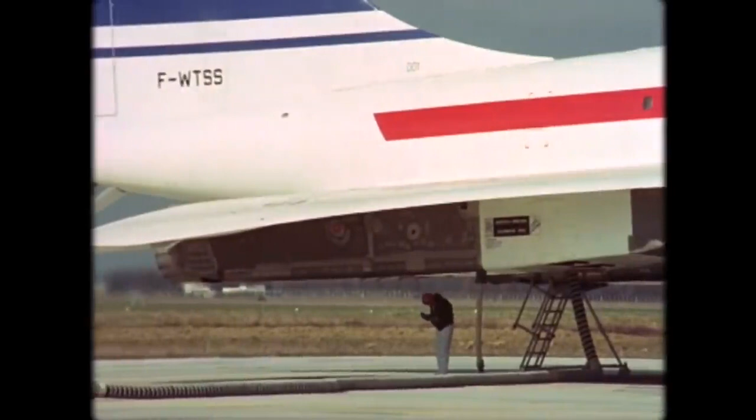The Concorde's legacy is marred by its commercial failure, but this engineering marvel was a triumph of ingenuity. Nothing remotely close to it had flown before, and nothing like it has flown since, turning what had been a military-only technology into a luxury flying experience required innovative thinking. This is the insane engineering of the Concorde.

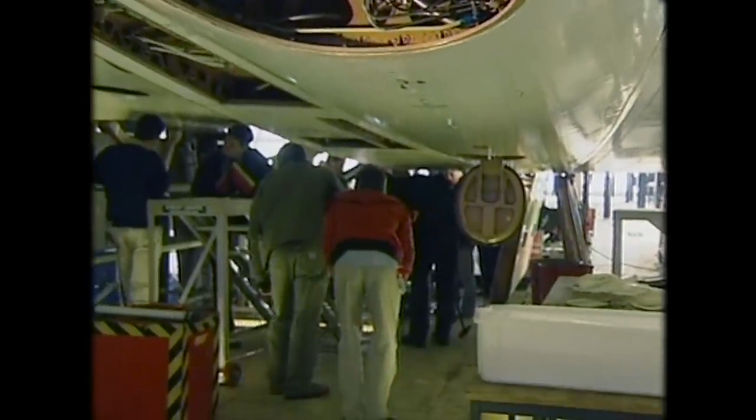The engineers of the Concorde had several unique challenges. Developing a supersonic plane is difficult enough with military design requirements, but developing a supersonic plane that would satisfy the wealthy customers it intended to serve is an entirely different ballgame.

Aerial refueling makes fuel efficiency a secondary concern for the military. The comfort of the plane's passengers is an afterthought at best, and the price tag attached to these often limited-run specialty planes is beyond the budget of a commercial airline.

Those needs are reflected in the Concorde's unique design: a sleek exterior hiding powerful engines, engines developed from the iconic British warplane, the Avro Vulcan.

Fuel efficiency and supersonic flight are two opposing ideas, but these engines, the Rolls-Royce Olympus 593, when flying at Mach 2, were the most efficient engines ever created.

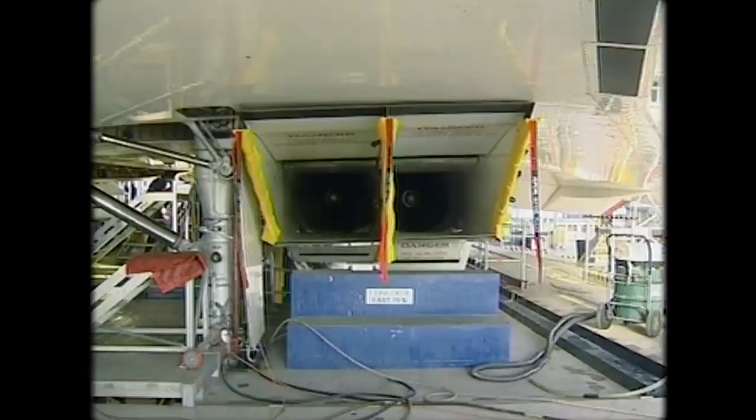These engines, when introduced for the Avro Vulcan, were capable of generating just 49 kilonewtons of thrust, but over the course of their adaptation for use in the Concorde, increased in thrust by over triple to a whopping 169 kilonewtons.

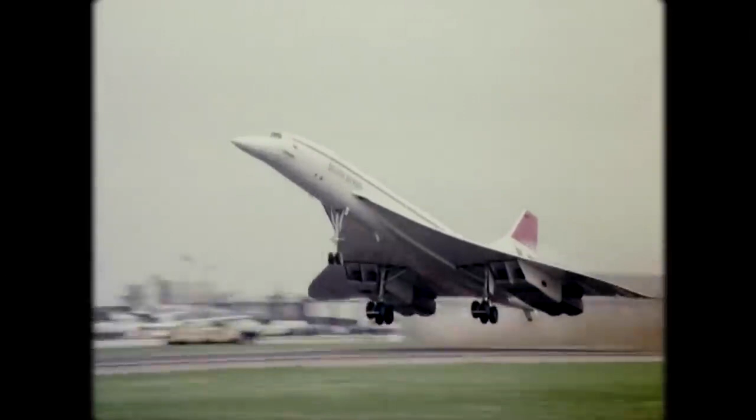20% of this thrust increase was provided by newly fitted afterburners, a technology typically reserved for military planes. Afterburners work by injecting fuel directly into the superheated and high-pressure exhaust of the turbine section.

Despite this air's journey taking it through the combustion chamber, only half of the oxygen in the air is consumed, leaving untapped energy in the exhaust of these engines. To capture this energy, fuel can be injected directly into the exhaust of the turbines and ignited, basically acting like a rocket stage of the engine, causing further expansion and acceleration of the exhaust through the exhaust nozzle.

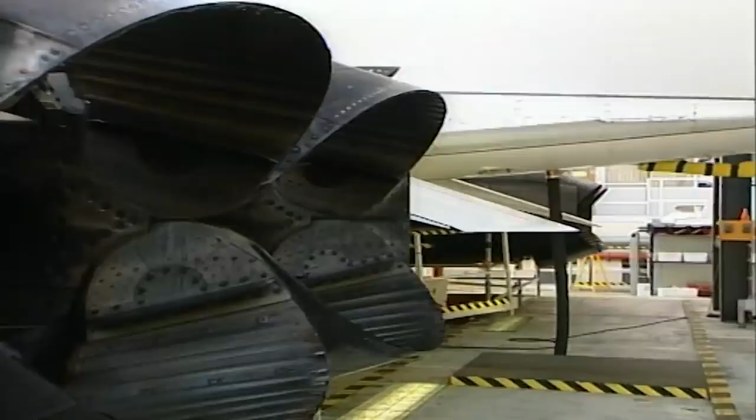However, this system is useless without a controllable nozzle. Typical airliner engines have a fixed nozzle, because these aircraft are expected to be efficient at a relatively low range of subsonic speeds. But the Concorde, with its massive range of speeds, needs not one, but two controllable nozzles to adequately control the engine's power.

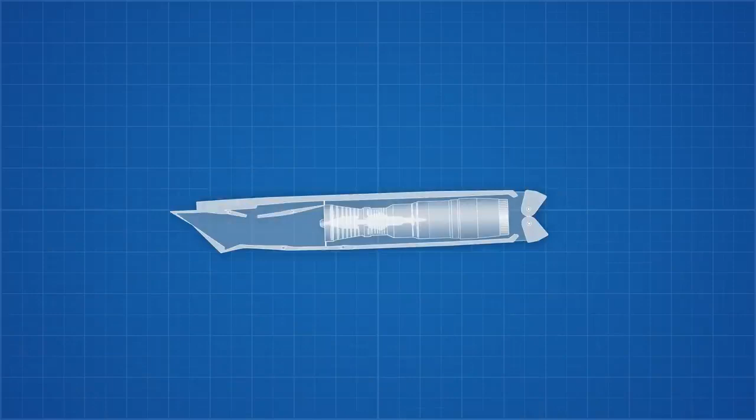The primary nozzle connects directly to the jet pipe's exit and consists of petal-like structures that can close or open to vary the diameter and therefore the area of the jet's exit.

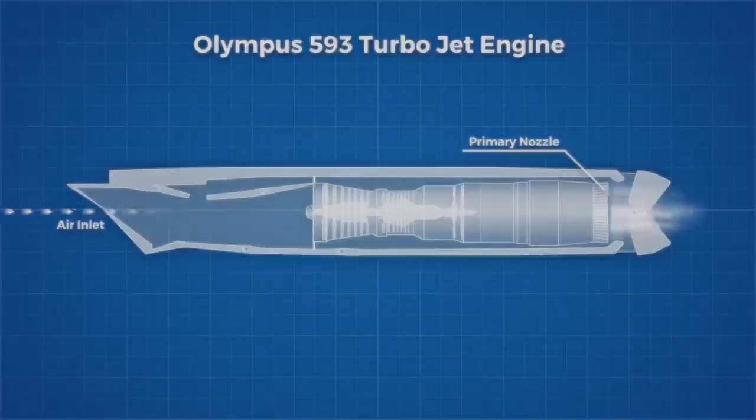When the afterburner, or reheat as the British engineers called it, was ignited, it caused a massive increase in pressure at the engine's exhaust. This increase in pressure could cause choked flow in the engine, where high pressure zones behind lower pressure zones will prevent air from flowing through the engine correctly.

To prevent that, the primary nozzle opens wider when the afterburner is active to decrease pressure and ensure the mass flow rate through the engine is unchanged.

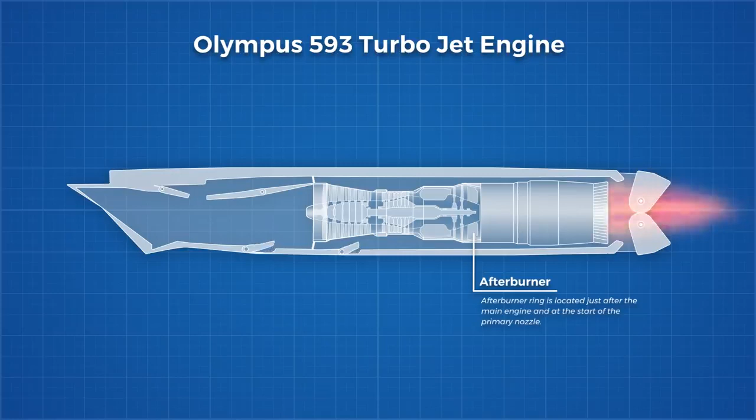However, at times, we do want to affect the flow upstream of the nozzle. The Olympus 593 was one of the world's first two-spool engines, predated only by the Pratt & Whitney J57 engine by just a couple of months. Two-spool means the engine contained two compressor sections driven by two turbine sections, each acting on their own concentric drive shafts, allowing the two sections to operate at different rotational speeds.

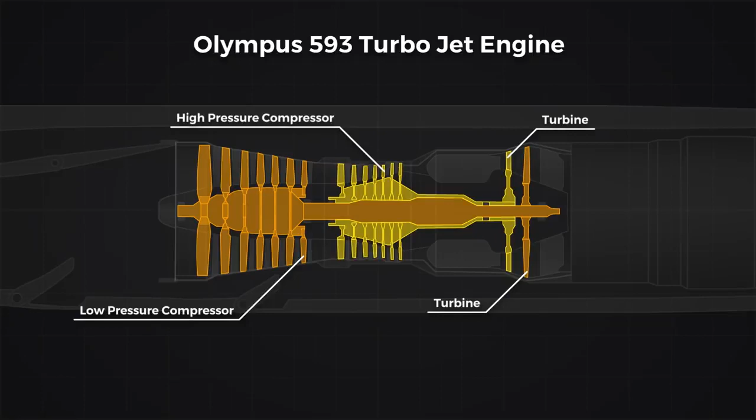When the primary nozzle was actuated, the varying nozzle pressure caused the low-pressure spool to either spin faster or slower, thus providing control of the engine to ensure it can perform at its optimum speed across its wide speed range.

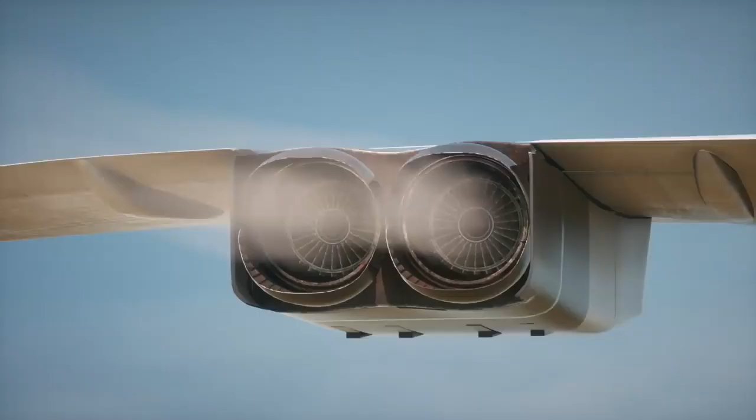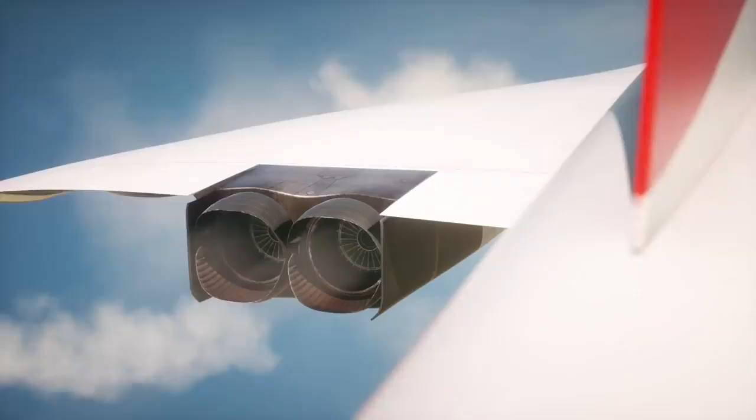The secondary nozzle function is just as complex. The eyelid doors look like some kind of steampunk blast shield, and for good reason. The force these secondary nozzles had to endure influenced their appearance, withstanding huge forces at both supersonic and subsonic speeds, and they could even close completely on landing to function as reverse thrusters.

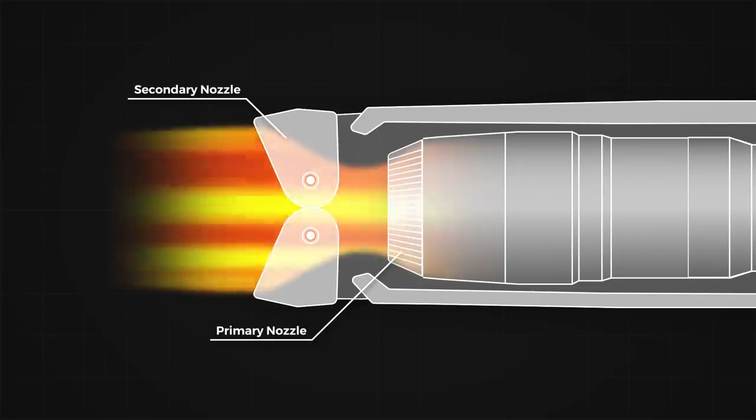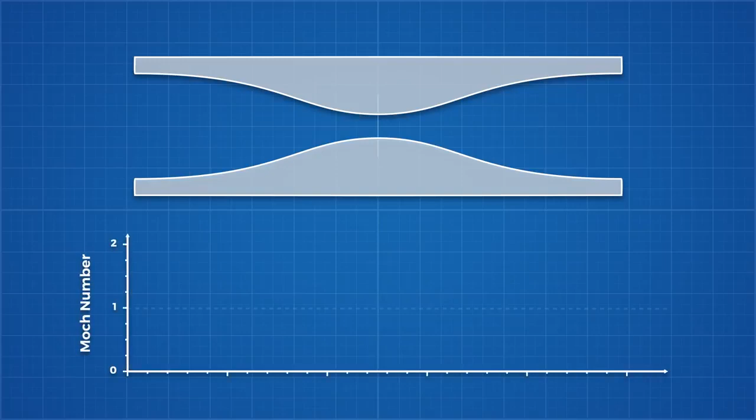By actuating these nozzles, the plane could carefully manipulate the exhaust velocity and thus maximize thrust, because together the pair acted as a controllable converging-diverging nozzle. Converging-diverging nozzles are typically used in rockets to accelerate the combustion products to their optimum speed and pressure. The opposite shapes are needed because air acts completely differently at subsonic and supersonic speeds.

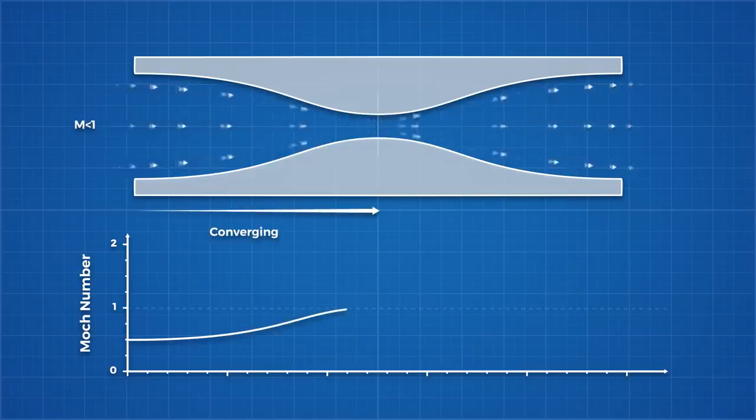For example, when subsonic air travels through a converging duct, it speeds up as the cross-sectional area decreases until some critical area, which is referred to as the throat. This is where Mach 1 would be reached. At this point, no further acceleration of air can occur as the flow is choked.

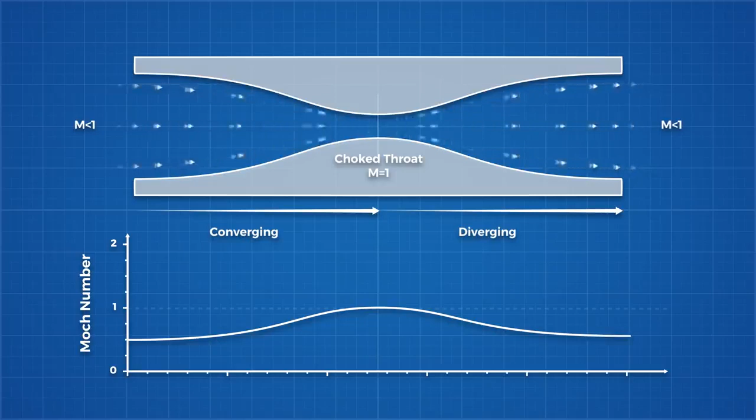Now, as you would expect, if that same subsonic airflow went through a diverging duct, the air slows down as the duct area increases. This is Bernoulli's principle at play. The bizarre thing is, the exact opposite occurs when air travels at supersonic speeds. A converging duct will result in a decrease in velocity, and a diverging duct will result in an acceleration.

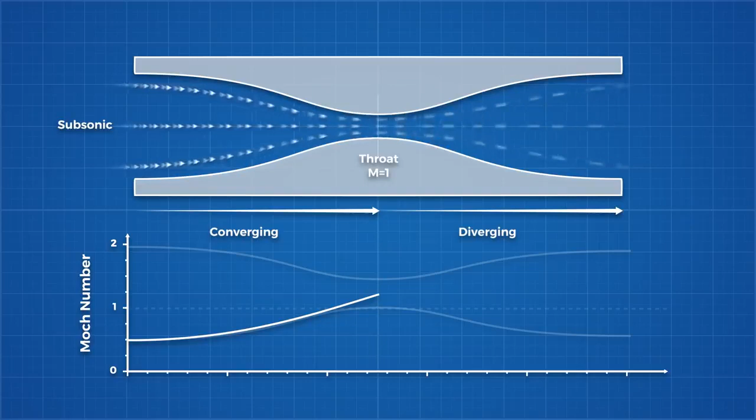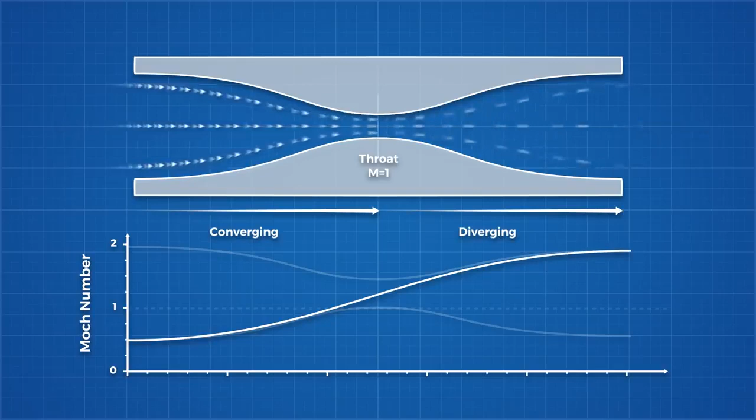So, in order to maximize the acceleration of our exhaust gases, we want to pass our subsonic air from the engine first through a converging nozzle, the primary nozzle, until it reaches Mach 1 at the throat. Then we want it to pass through a diverging duct, the secondary nozzle, at supersonic speeds so it can continue to accelerate. These paired nozzles allowed the Concorde to carefully optimize the nozzle profile for different flight conditions, a marvelous piece of engineering. The same principles were used for the inlet.

No engine can operate with supersonic flow. The shockwaves that would form inside the engine would cause all kinds of chaos. So, the Olympus 593 needed some way to decelerate the supersonic air entering its unique square inlets. These squared inlets were designed to simplify the complicated task of creating nice laminar subsonic flow for the engine's compressors.

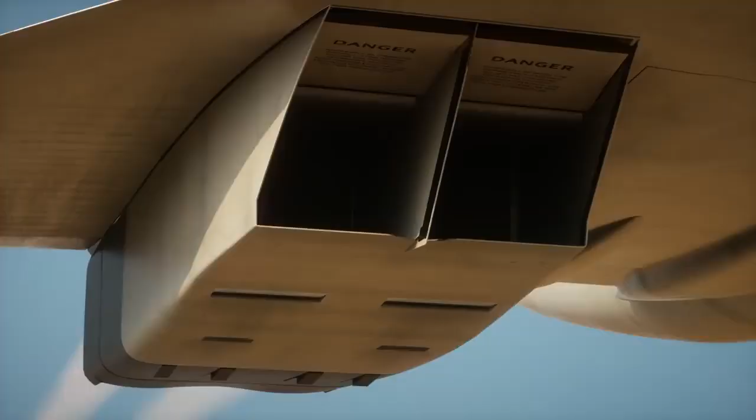Inside were a series of ramps and doors that could open and close depending on the flight regime the intake was encountering. At takeoff, the engines required all the air they could get to accelerate the plane enough to get those cumbersome delta wings to generate enough lift to take off.

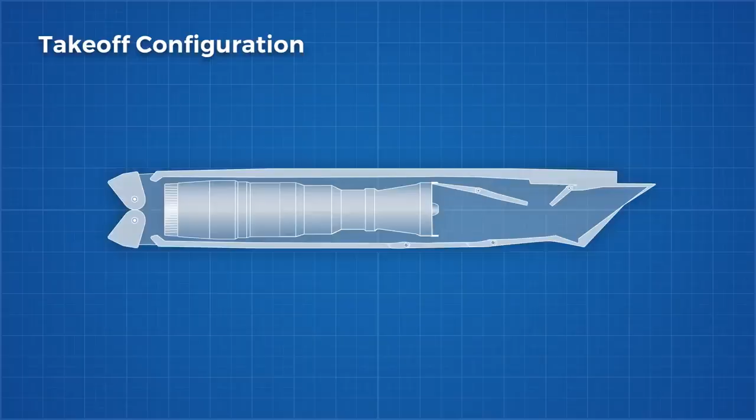To funnel as much air as possible into the engine, the two variable ramps were retracted into their closed position. A spill door in front of the engine intake was held open to allow additional airflow into the engine, while two bypass doors which controlled the air around the cooling passage around the engine were also closed.

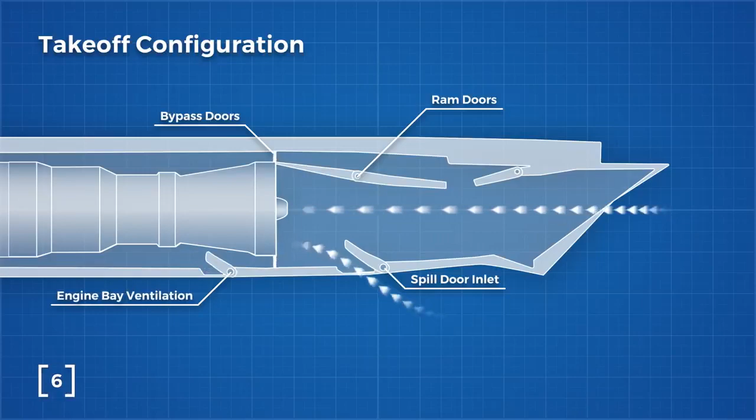The afterburners were also active during takeoff, but soon after, the Concorde was required to enter a noise abatement stage of flight, where the afterburners were turned off and power was reduced as the plane climbed. At this point, the bypass doors open to allow for cooling air to travel along the outside of the engine.

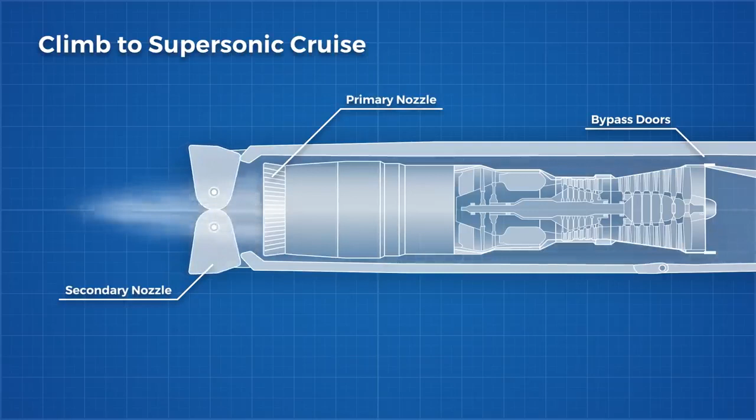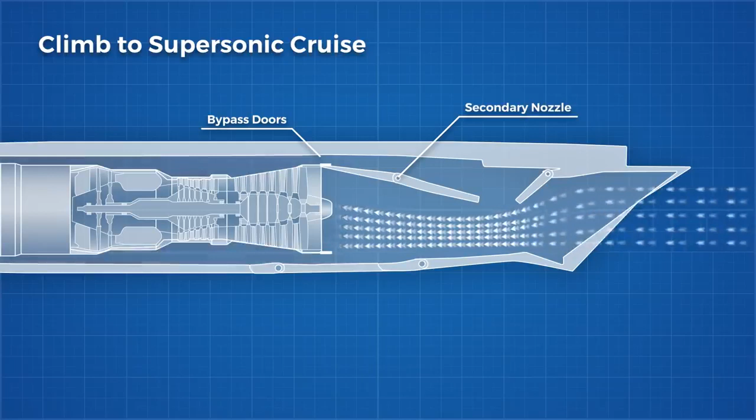As speed increases, the primary and secondary nozzles adapt, gradually beginning to form the ideal converging-diverging nozzle for supersonic cruise. Parallel to these changes in the nozzles, the inlet ramps actuate to create a converging inlet that slows down and compresses the supersonic air entering the engine.

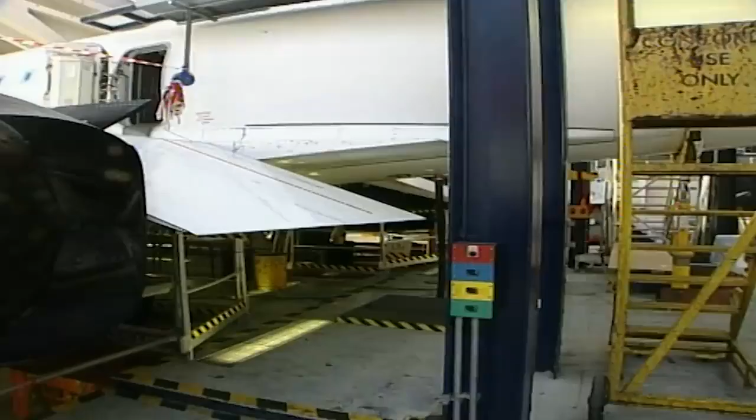The fuel consumption of supersonic flight is massive, but that is primarily driven by aerodynamic drag, not thermal efficiency. This supersonic air being rammed and compressed into the engines helps the engine immensely in achieving its high thermal efficiency.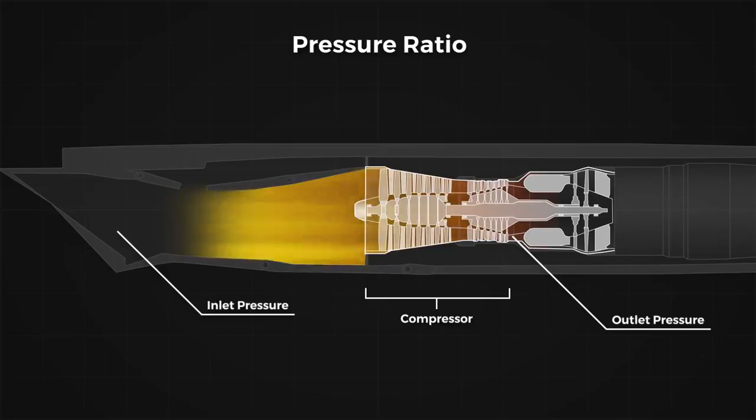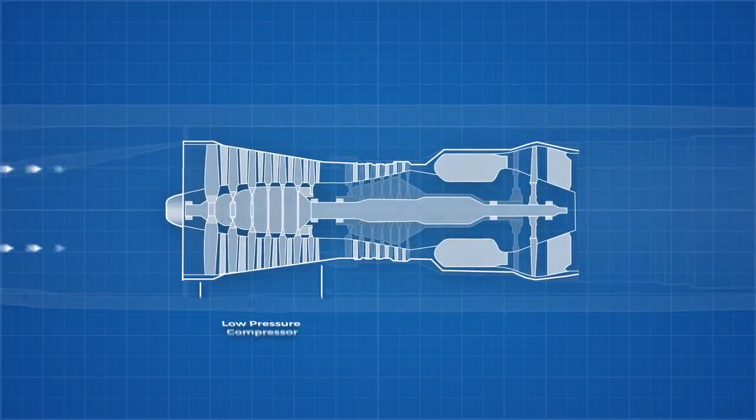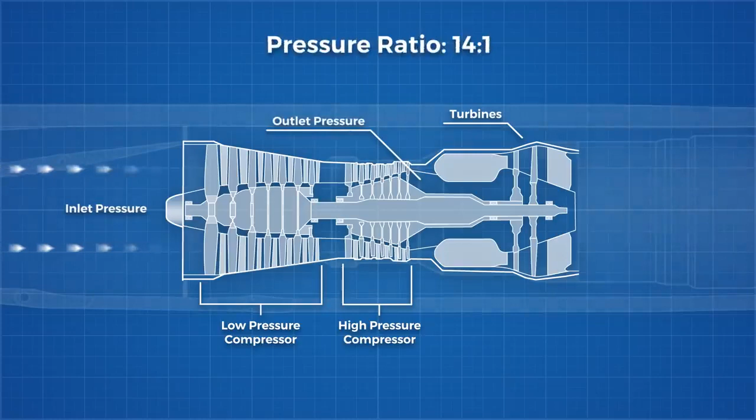The low pressure and high pressure compressors together provided a pressure ratio of 14:1, a moderately high pressure ratio that would provide moderate efficiency at subsonic speeds.

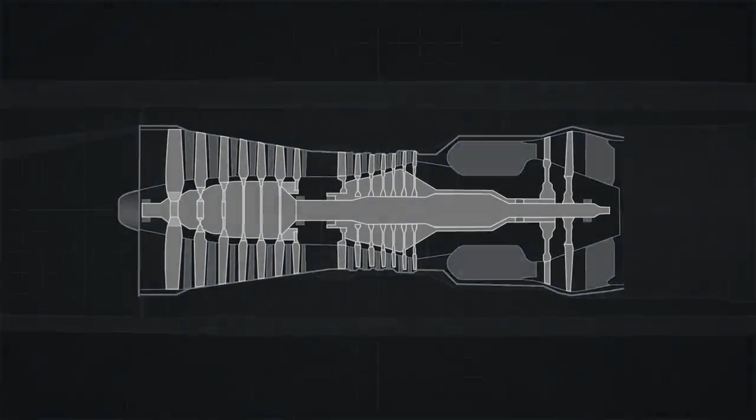However, the pressure ratio multiplied to 80:1 at cruise as the supersonic air rammed into the unique square inlet engines. This elevated pressure ratio resulted in extreme temperatures inside the engine that necessitated the use of high-temperature alloys typically reserved for the turbine blades.

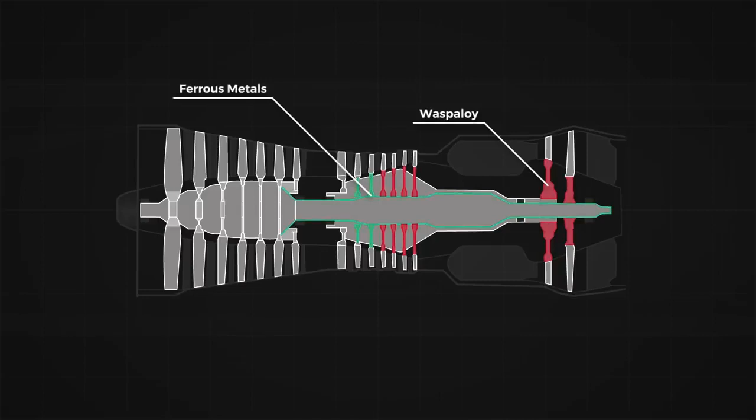Titanium blades were used for the early compressor stages, and high-temperature nickel alloys were used in the even hotter later stages. Cooling the driveshaft bearings became another engineering challenge. Increasing the mass flow rate of cooling oil was not enough to keep the bearings within a safe operating temperature.

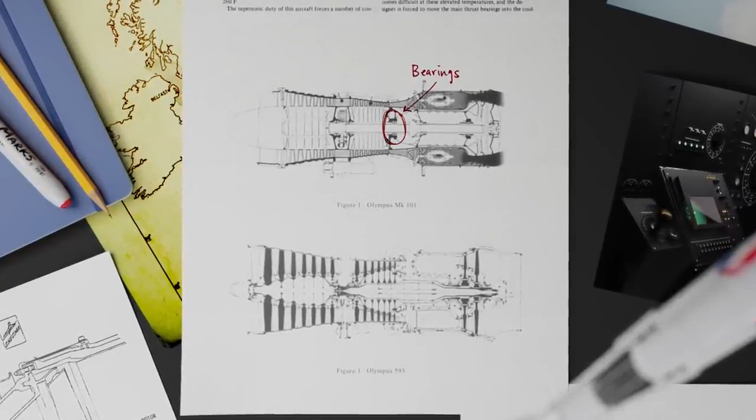Looking at the differences between the original Olympus engines used in the Avro Vulcan and the Concorde hints towards some changes the engineers were forced to make. A center bearing located immediately after the high-pressure compressor here no longer exists in the Olympus 593, and the driveshaft preceding it takes a bottle-like shape, increasing in diameter in the new gap between bearings.

This center bearing had to be removed because the temperatures were too high in this location directly after the high-pressure compressor. But without the support of the bearing, the driveshaft became too flexible. To accommodate this change, the driveshaft needed to increase in diameter to increase stiffness.

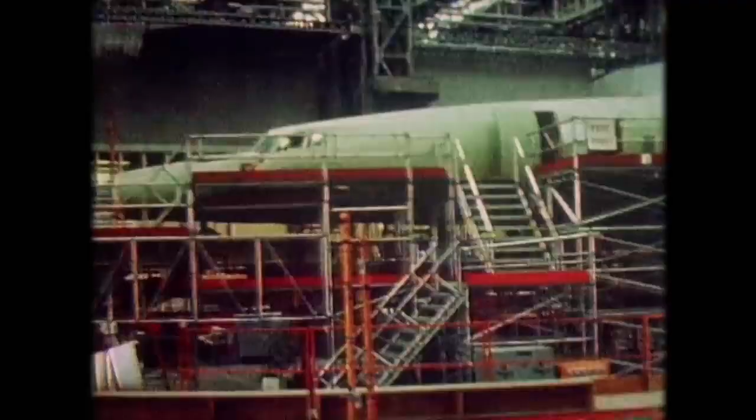The Concorde is full of strange little design details like this, solutions to unique engineering problems caused by the immense cruising speed. In order to decrease fuel consumption as much as possible, the front area of the plane needed to be minimized. Delta wings allow wing spans to be decreased dramatically and reduce the drag created in supersonic flight. However, it creates some issues for low-speed flight, where they struggle to generate enough lift, making takeoffs and landings difficult.

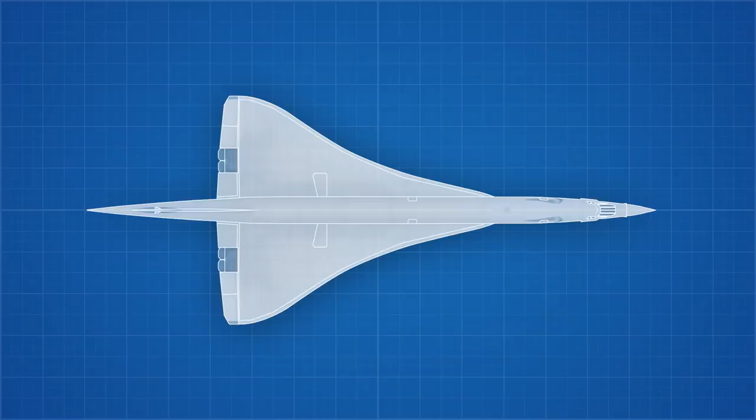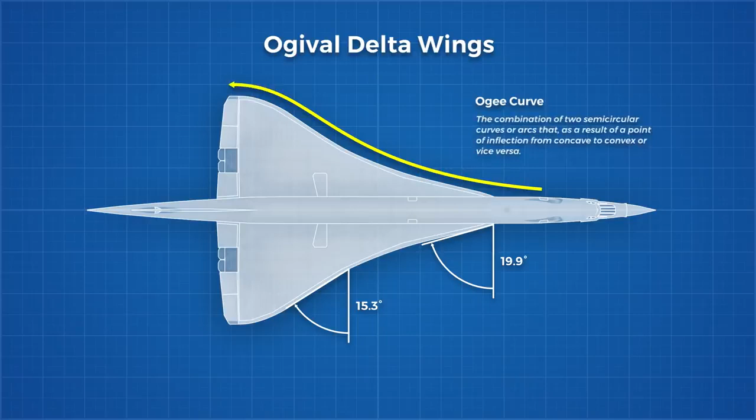This is where the ogival delta wings of the Concorde come into play. This is a form of compound delta wing where there are 2 sections to the wing, with the forward section having a higher sweep angle than the rear section, connected with an ogee curve, going from concave to convex curves smoothly. This shape allowed the Concorde to generate additional lift at low speeds through the use of vortex lift.

When flying at high angles of attack, separated airflow would roll over the wings to form 2 stable cone-shaped vortices, where airspeeds were high and air pressure was low, effectively creating lift.

However, those high angles of attack needed for low speeds created some serious visibility problems for the pilots, whose cockpit would have had a lovely view of the sky if not for the iconic droop snoot.

The droop snoot is a one-of-a-kind solution, a mechanized nose that could drop by 12.5 degrees to provide the pilots a clear view of the runway during these high angle of attack maneuvers.

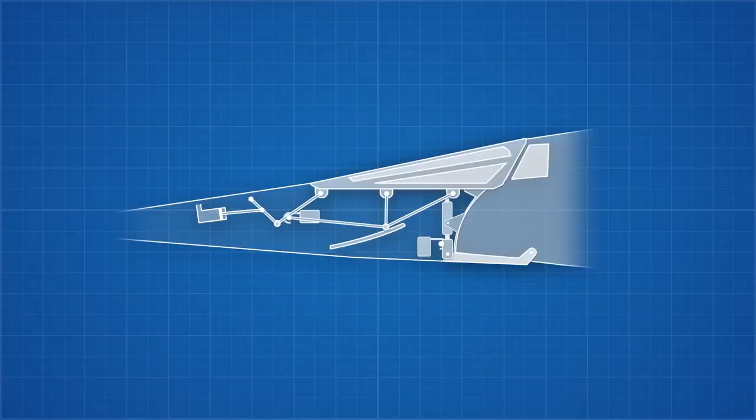The mechanism had 4 positions, controlled by the pilot with this lever. The top position was the fully retracted position used in supersonic flight.

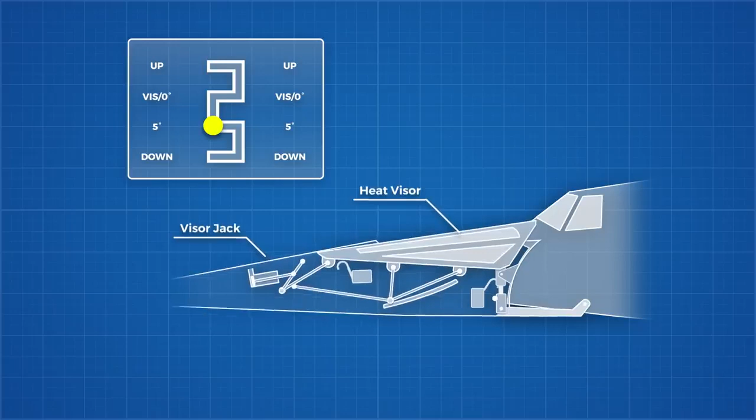The second position lowered a specialized heat shield visor used to protect the cabin windows from the heat of supersonic flight. When placed in this position, the visor hydraulic actuator would retract, causing the visor to retract into the nose fairing. The next position was the 5-degree down position used for takeoffs and taxis, extending this hydraulic actuator.

The final setting pushes the nose down further into the 12.5-degree setting needed for landings.

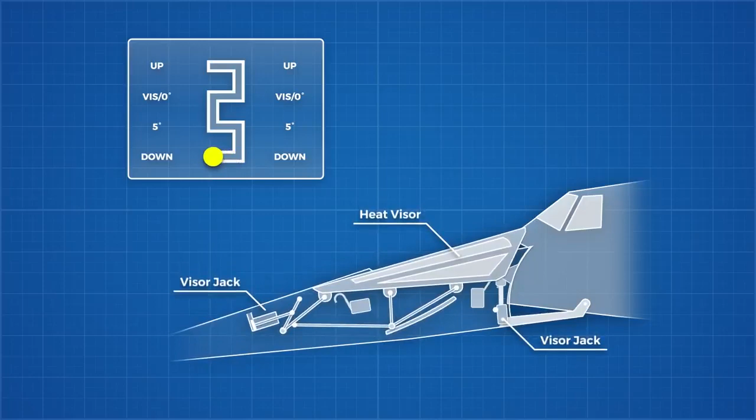The plane also had an extendable tail landing gear, which on most takeoffs and landings was not needed, but was present to protect the plane's engines, which would be the first point of contact for what would normally be a tail strike for other airliners.

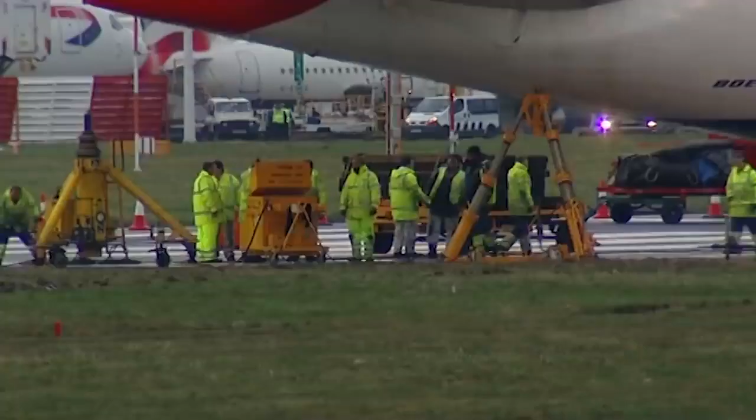Tail strikes aren't all that uncommon, usually happening on landings in difficult conditions. Some planes, like the 777, also have extendable protection measures in the form of tail skids, as a strike can, at best, force a plane into maintenance, costing the airline company money, or, at worst, cause serious damage to the pressure bulkhead and put the lives of the passengers aboard at risk.

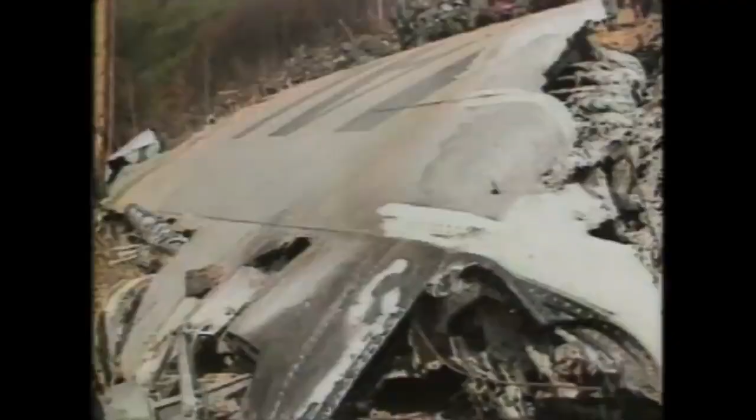In fact, a tail strike is responsible for the crash that claimed the most lives out of any single aviation crash in history. In 1985, a Japan Airlines 747 flight crashed in the mountains of Japan, 7 years after a tail strike had occurred, which had not been correctly repaired.

With the high angles of attack demanded by the Concorde for landings, this protection was vital to keep the plane safe.

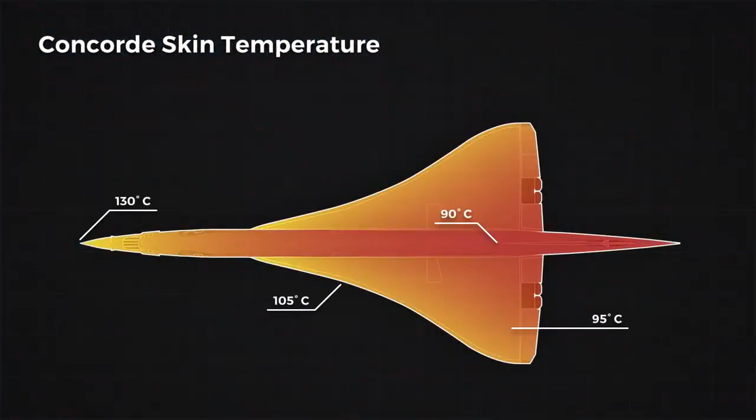The visor was needed during supersonic flight because the nose of the plane experienced temperatures of around 130 degrees Celsius, while cruising at an altitude of 60,000 feet, where ambient temperatures are usually around minus 56 degrees Celsius.

The Concorde went through several design iterations with this forward-facing protection. The earliest prototypes simply removed the lower forward-facing windows completely. But it turned out that pilots like having a view of where they are going, so this wasn't an option for the full production model.

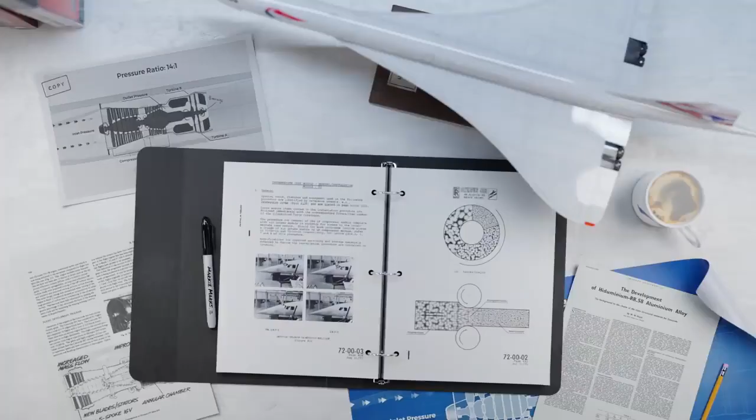However, a version of the droop snoot with a fully metal heat shield was originally considered for the Concorde, which would have eliminated forward visibility during cruise, which was considered non-essential. But thankfully, these heat-resistant glass visors were used in the final version.

Working with such high temperature variations between takeoff and landing causes some serious structural issues, especially with the frequency of flights needed to make a commercial plane financially viable. The thermal expansion caused by these temperatures made the plane grow by 20 centimeters on each and every flight. The fatigue this thermal stress could cause would eventually result in catastrophic failure if not properly accounted for.

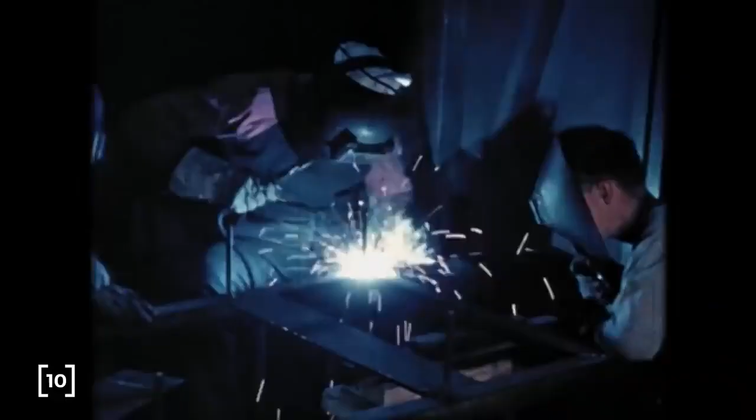The first issue was finding a material capable of dealing with this heat. Titanium, which was used for the SR-71, could have been used, but due to its cost and weight was ruled out early. Traditional aluminium would not be capable of withstanding these conditions, but a special aluminium alloy, Hiduminium RR58, developed in Britain during World War II for the newly invented gas turbine engines, could.

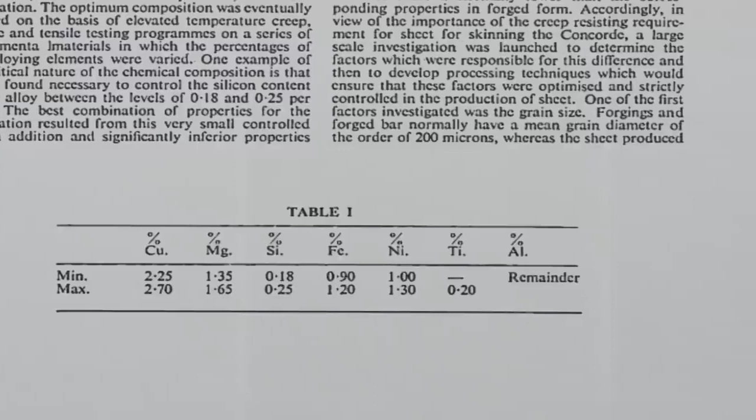The alloy consists of copper, magnesium, silicon, iron, nickel, and titanium, with the remaining percent being made up of aluminium. Although this material had been developed decades prior to the Concorde, it had never been used in this application.

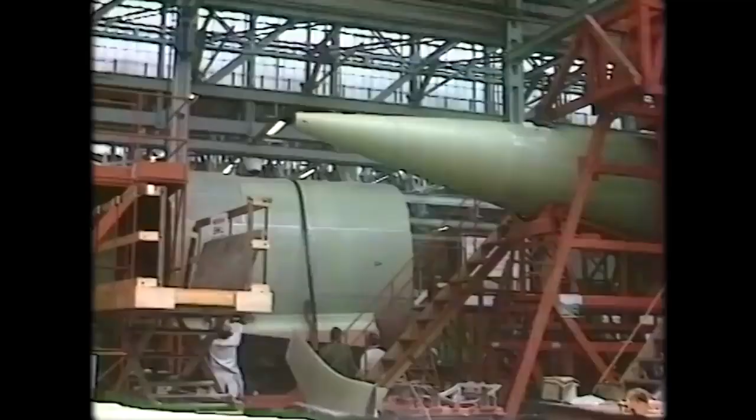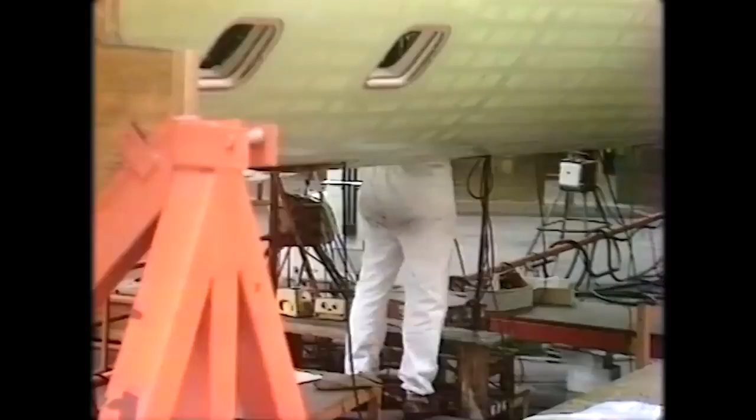With lower average temperatures than its traditional use inside gas turbine engines, but much longer life requirements, the parts would also be manufactured using different techniques, like the cold-rolled sheets needed for the fuselage. This one process alone affected critical material properties that improved heat resistance.

Forged parts tend to have larger crystal grain structures than rolled components, which helps forged components resist the internal crystal structure from creeping when under stress and heat.

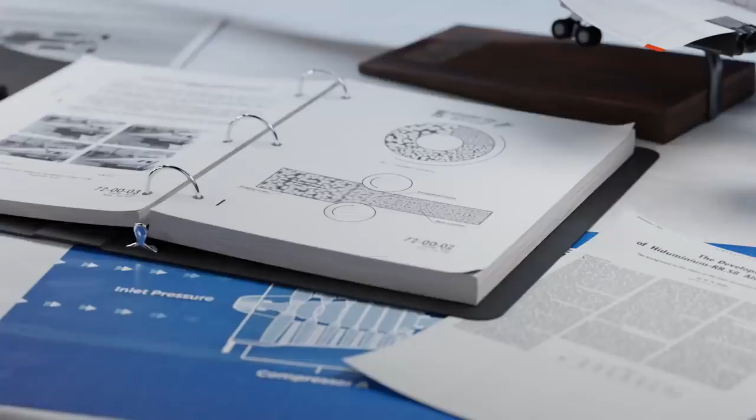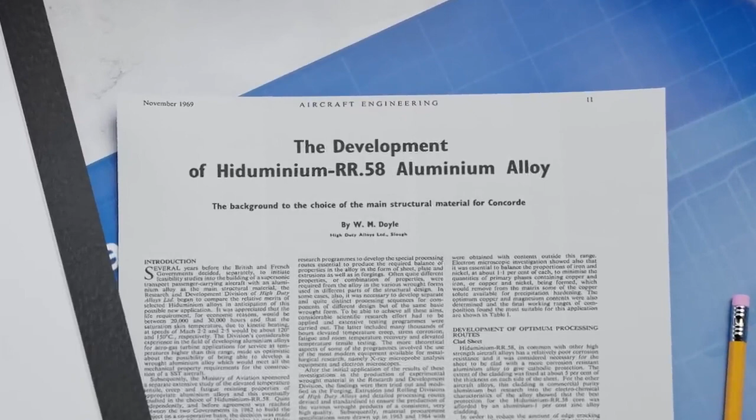To adapt this material for the cold-rolled skin of the Concorde, the engineers at High Duty Alloys had to develop new manufacturing methods to maximize the grain size of these cold-rolled components. Manufacturing knowledge that has no doubt been used by Rolls-Royce for modern-day applications.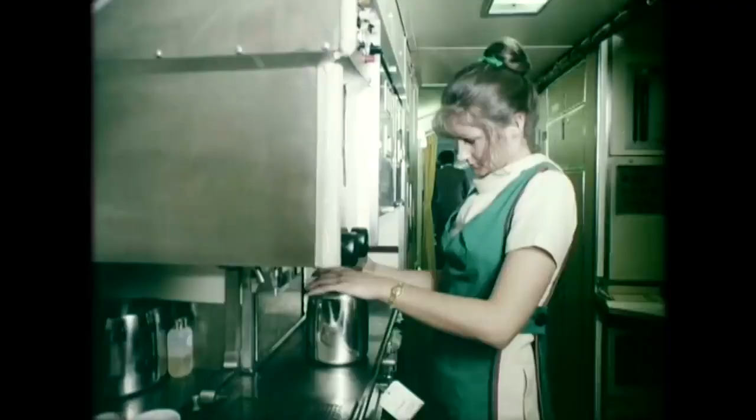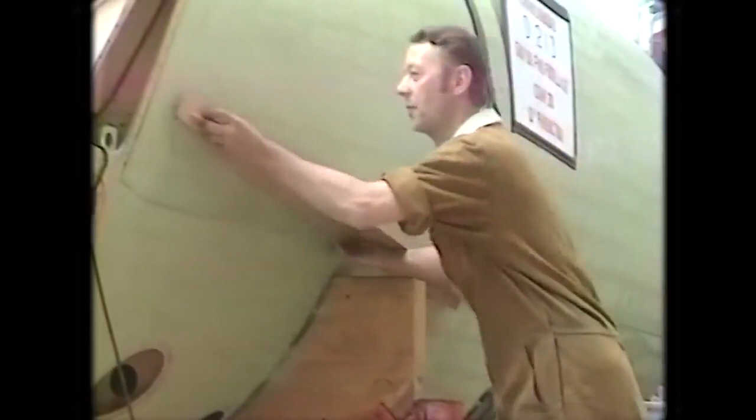Now that a suitable material had been developed, shaping it in a way that allowed expansion was crucial. Most of this expansion was imperceptible to the crew and passengers of the Concorde. Interior panels could slide past each other to hide the expansion from the passengers, and crucially prevented stress forming as a result of uneven expansion between the hot exterior and cool interior.

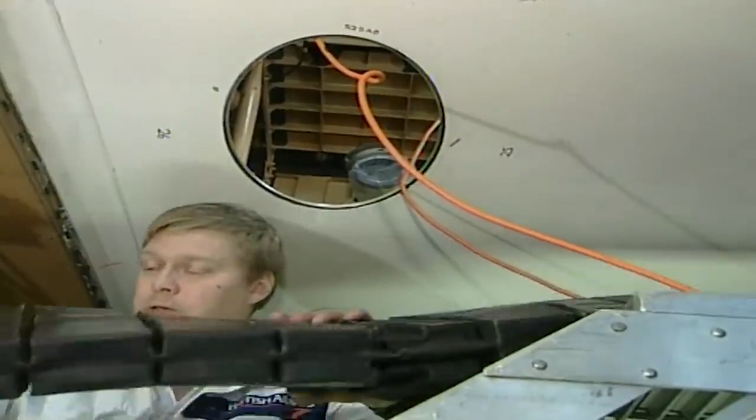Wiring around the plane was given slack to prevent the wiring from snapping as the plane expanded, and many components around the plane were corrugated, meaning parts were given a curved shape. This allowed these parts to stretch and flatten the curves like a spring.

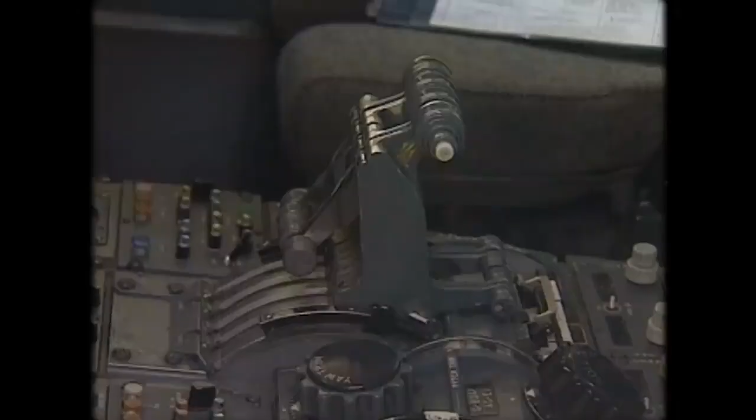However, one expansion gap was quite obvious to the crew of the Concorde. As the flight approached its cruise speed, a gap between the flight engineer's console and the cockpit bulkhead began to form, a gap large enough to slide your hand inside of. Or, as became tradition for retiring Concordes, the flight engineer's cap would be placed inside the gap as it closed.

Leaving it permanently wedged. Like the SR-71, this continual expansion and contraction cycle caused some serious issues with fuel tank sealants. In order to deal with the expansion cycles, a sealant needs to be flexible. Even mundane plastic sealants on household windows need this quality to prevent small movements from allowing drafts getting through.

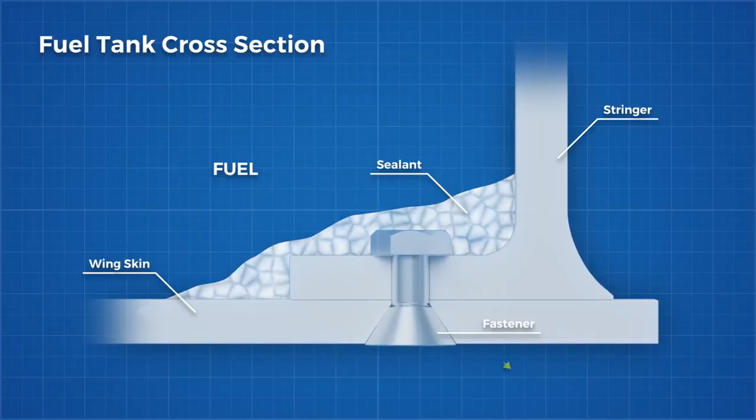The issue is that high temperatures tend to harden sealants over time, and then, as the expansion cycles continue, the sealants begin to crack and allow fuel to spill out. While the temperatures the Concorde experienced were vastly lower than the SR-71, it was still a maintenance issue.

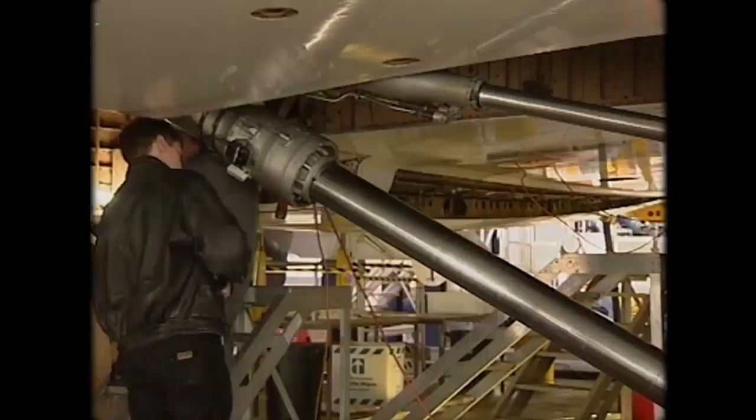The Concorde used a high-temperature sealant called Viton, but even this sealant hardened and cracked over time, and so, approximately every 1,100 flying hours, roughly once a year, the Concorde was forced into maintenance, which could take 3 weeks to complete. Maintaining the Viton seals was one of the many procedures needed. Fuel tanks would be emptied and then vented for 24 hours to allow technicians to climb inside and manually inspect and replace sealant.

This was a massive job and often required the technicians to work with just touch, as access to tanks 5A and 7A on the outermost part of the wing was impossible.

The Concorde had 13 separate fuel tanks in total, taking full advantage of the large amount of interior volume the Delta wings provided. Without these fuel tanks, capable of holding 119,000 litres of fuel, the Concorde could not have made it across the Atlantic and would have been completely useless.

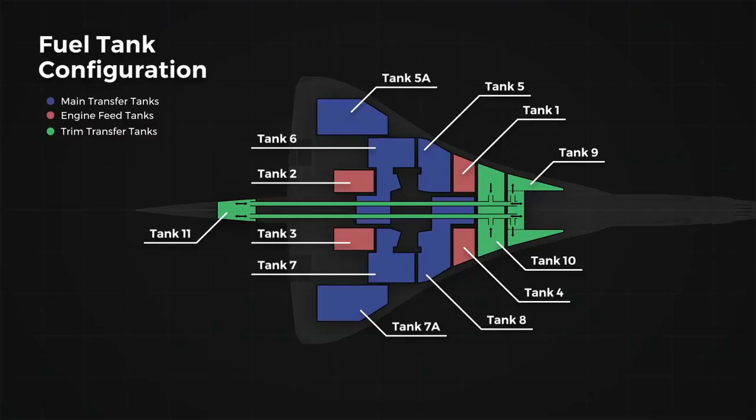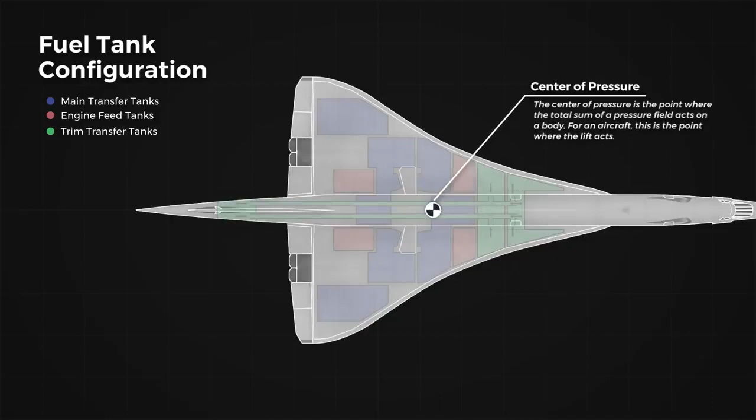These fuel tanks played a vital role in control of the plane too. As speed increases, the centre of pressure of a wing, the point through which all lifting force acts, tends to move backwards. This is usually not a significant issue for slower commercial airliners, but the Concorde's centre of pressure moved back by as much as 1.8 metres, more than enough to cause significant control issues that would push the plane into a nosedive if not accounted for.

Usually, such a shift would be counteracted by the elevator, which could stabilise the aircraft in pitch from changes in the centre of pressure. But Concorde did not have a horizontal tail, and adding elevons on the wing big enough to counteract this change would have resulted in high levels of trim drag at such high speeds.

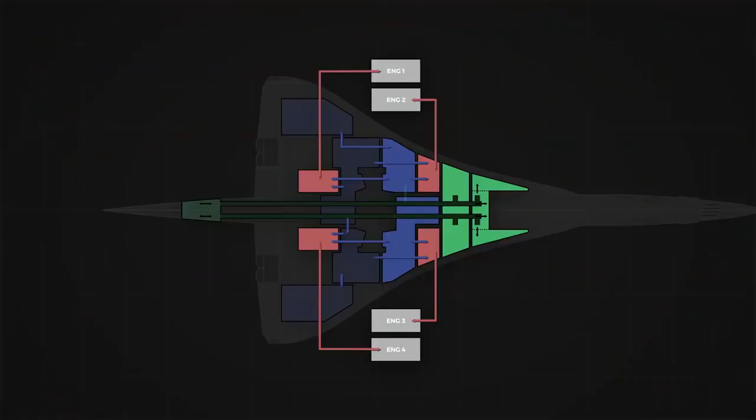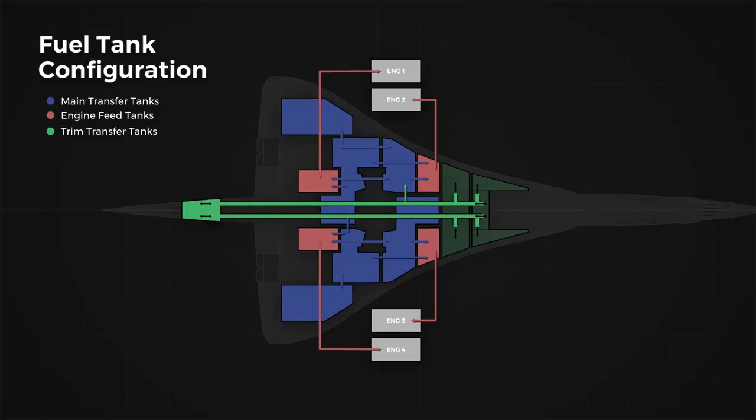So Concorde engineers instead used the huge tanks they had at their disposal to deal with this issue. As the plane approached Mach 2, fuel would begin to be pumped out of the forward trim tanks and into the rear trim tanks and collector tanks in the wing, moving up to 20 tons of fuel rearwards and shifting the centre of gravity backwards to match the shift in centre of pressure, keeping the plane balanced without adding any additional drag with control surfaces, an elegant solution using the tools at hand.

The Concorde is an icon in the history of aviation. I can't help but feel an odd sense of nostalgia for a plane I never got to fly in.

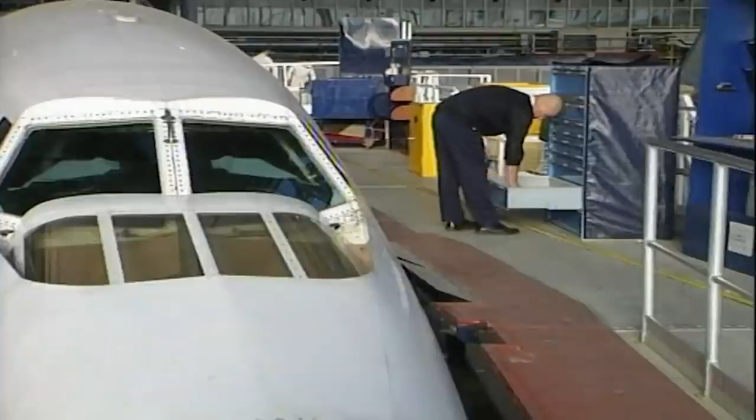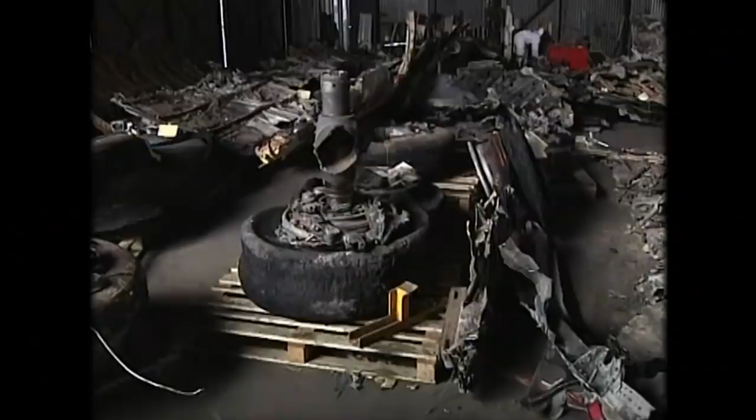Hundreds of thousands of passengers can see one of the last remaining Concordes while arriving and departing from Heathrow. Nicknamed Alpha Bravo, this Concorde made its last flight a month after the tragic loss of Air France 4590. It was undergoing major interior upgrades when the decision to retire all Concordes was made, stranding the plane there indefinitely. Alpha Bravo has been in limbo ever since, never getting to undergo the planned upgrades to prevent another disaster like Air France 4590 from ever happening again. An unintentional monument to Britain's storied history in aviation.

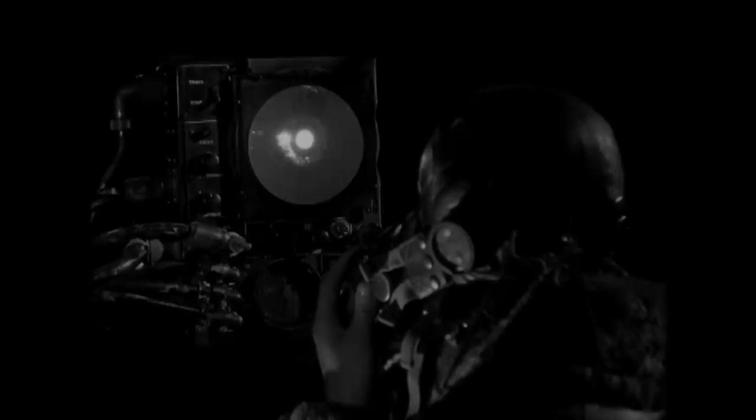Accidental monuments like this are scattered all across Britain. Gigantic, no longer functional radar towers can be found all over Britain. These towers were among the first radar systems ever constructed and played a vital role in the defence of Britain during the Battle of Britain, a system that the Germans vastly underestimated, thanks to not just the technology, but the logistical and strategic systems that supported them.